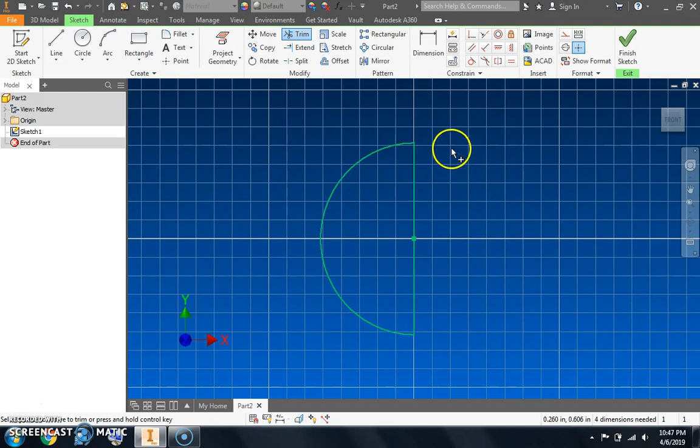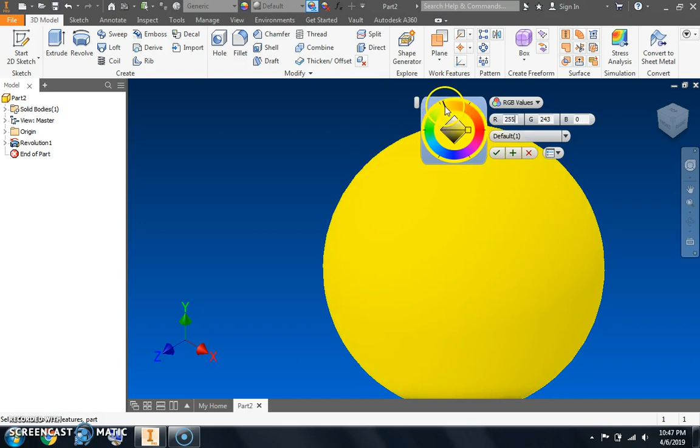Use the trim command, clear off half of it, finish the sketch, do a quick revolve. It's already going to find the side. The axis is going to be that center line. And that's how you're going to end up with the circle. To get that complete sphere, we could change the color of it. The majority of the characters in this particular cartoon are yellow, so I'll set that to yellow.

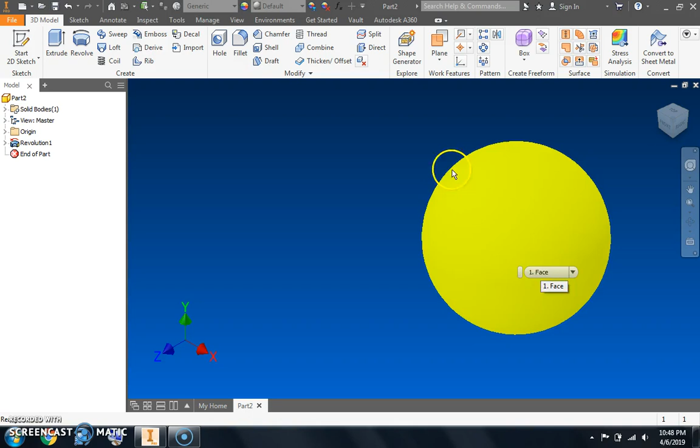Alright, next. We need to draw the eyes, the nose, the ears, all that stuff. So the problem is you can't start a 2D sketch because there's no flat surface to draw on. We're drawing on a sphere. So to change this up, we're going to come over to Origin, turn on the plane that runs through the middle of this thing. So you're going to find the one that runs through the middle. I'll right click, turn on visibility. So now that is visible.

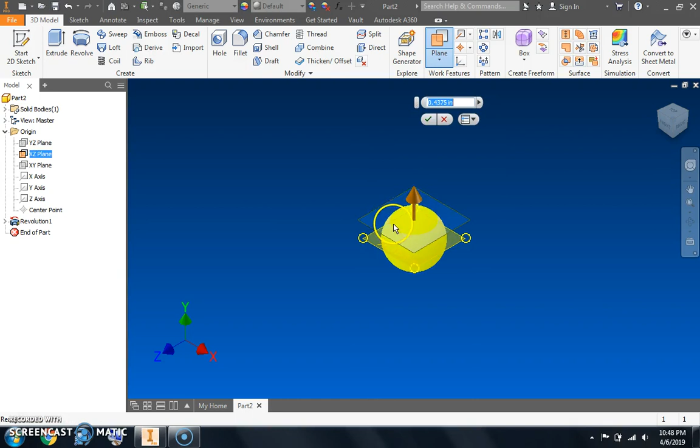We look at this thing from the side. It ends up being dead center. Our eyes need to be higher than that. So I'm going to come over, start a work plane, pull a work plane up higher. How high am I drawing this work plane? Well, if we look at this thing from the side, you can adjust this. Where do you want those eyes to land? So somewhere in this area. We can always adjust it later. It doesn't have to be perfect to set it off. We're going to hit the check mark.

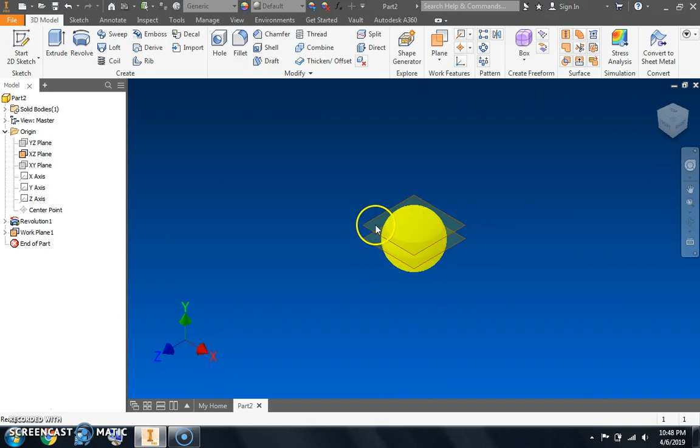Alright, we're looking at this thing from the side. You now have your work plane and you have your origin. I can turn off the origin, so I'll turn off visibility on the origin. I'm just dealing with the work plane. The work plane is roughly where the eyes are going to be. They might be higher, they might be lower. We can always make that adjustment at a later time if I'm off. So I'm going to start a 2D sketch. I'm going to select that plane, and now I'm actually drawing on that sketch.

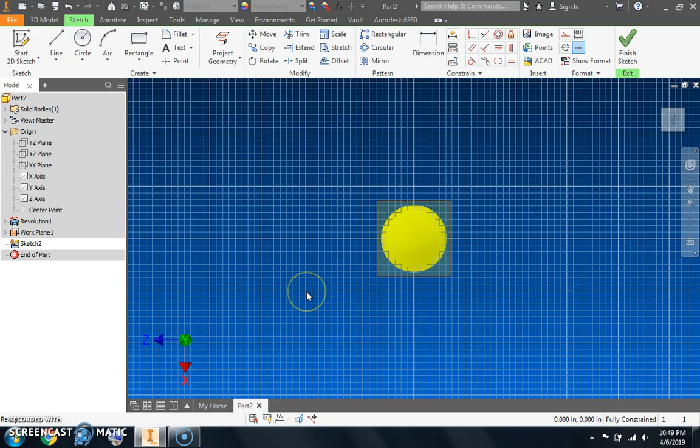When you go to draw on this sketch, something we haven't talked about yet, if you highlight this when it's red and I right click and I choose Slice Graphics, F7 on your keyboard, I click Slice Graphics. What that does, looking at this thing from the side, it actually chops off the top. So you're actually sketching inside of the shape, which is what we need because you're going to do a sketch that's going to be inside the shape. That's what we're going to talk about now.

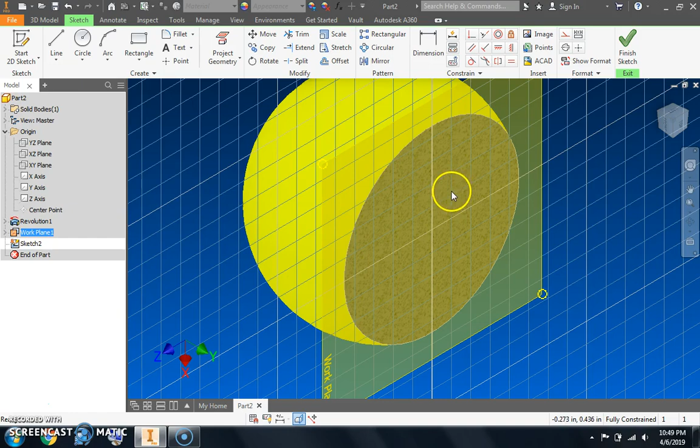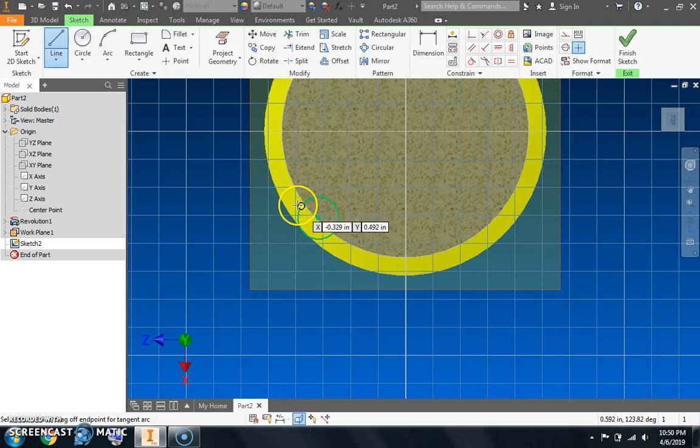So I look at this thing from the top. I determine where I'm going to put my eyeballs. So if I come over with a circle, you could do this with arcs, depending on what you want those eyeballs to look like. So I'm going to come in here, draw my first eyeball. Then come in with your line tool. When you go to sketch this line, I can draw this here on an angle. Trim off the excess, and I have a half a circle.

It does not need to be lined up. It can be off. You could always come in if you needed to. You could select everything, rotate it from the center point, and then you can spin this thing around in the direction that you need.

Alright, it does not matter where you're going to end up putting this, but you might not want a perfect circle. You might want more of an elongated half a circle. So it doesn't have to be a perfect circle. Don't feel that you need to use that circle tool. You can always draw it with the arc tool and get a much longer arc. You don't necessarily need to use a circle.

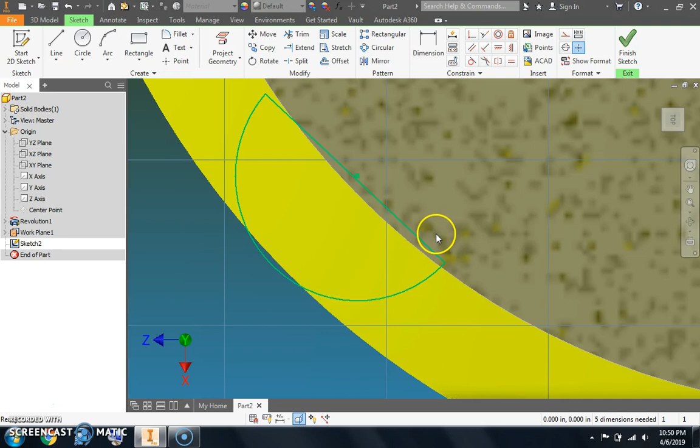Alright, so with this selected, I hit finish sketch, and we look at it, and we can see most of the circle at this point. Alright, so what I can do is, I choose Revolve, I come in, I select the surface, okay? Then I select the axis, and it will rotate that around.

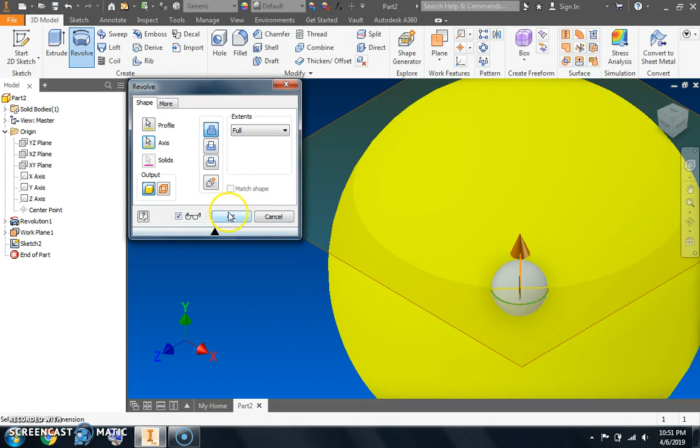I press OK. If we go to color this in, most of the characters have black eyes, so with this selected, I can come in and set that to a black color. All right. Looking at this thing from the front, okay, my eye is off to the left. I could always come in,

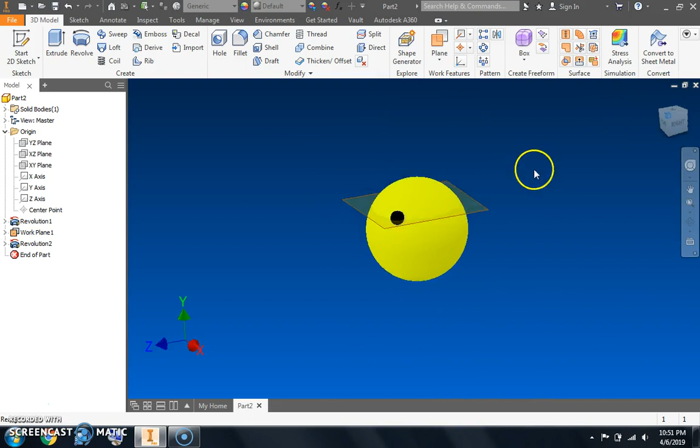turn on my origin, okay, which runs through the middle of this thing, turn on visibility, okay, there's my eye, it's dead center, okay, we all know where I'm going with this next. So if I choose mirror, okay, with everything selected, I select mirror, I select the eyeball, I select the plane that I'm going to mirror this through, alright, and the other eyeball will end up over there on the right, okay, they will end up being evenly spaced.

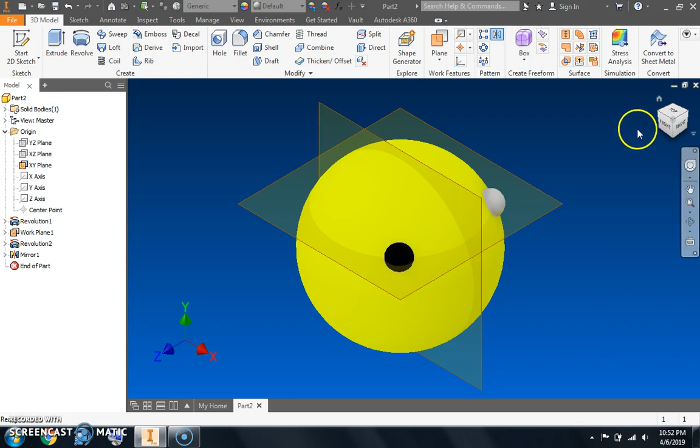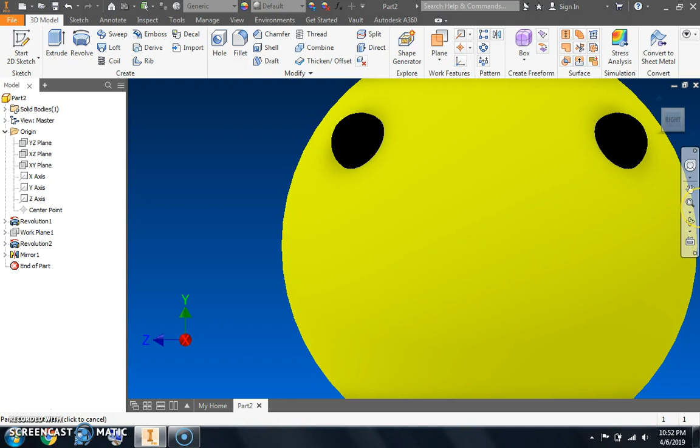I can color that eyeball in, currently set to gray, okay, I can set that one to black, turn off some of my work planes, okay, turn off visibility, alright, and I can also turn off the work plane that runs through the middle of this thing, okay, we look at this thing from the front, the eyes are starting to form. If you want them to be closer together, you do not have to start all over again,

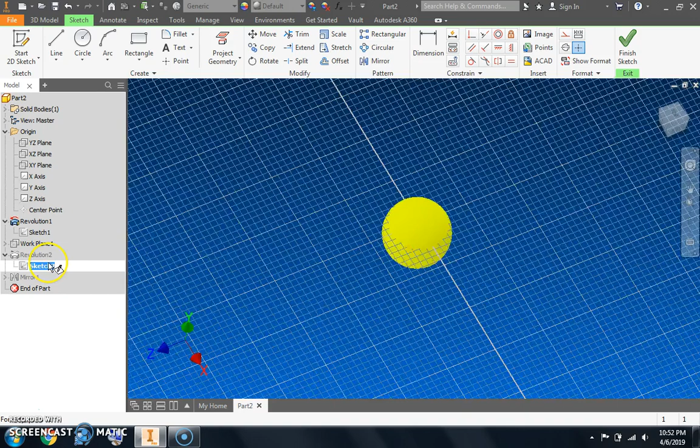we can come over, find the revolution, which in this case is right here, okay, and at this point, with the original revolution, I can get over here to my sketch, which ends up being on revolution 2. I double click, okay, I am now editing my sketch. I can right click on this and slice the graphics so I can see my sketch.

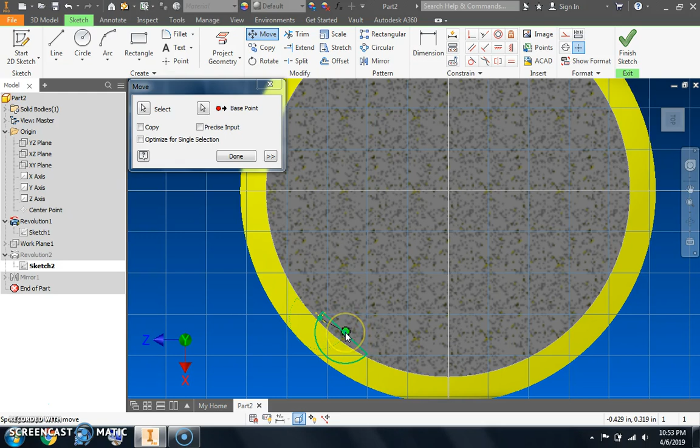And if I needed those eyes to be closer together, I could highlight all of this and move it over, okay, and it would be towards the center of the head, or I could move it further away, depending on what you're trying to do. With this being the demo, I'm not going to spend a whole lot of time here in the video, but we could come in, select the move tool, I could highlight all of this, and then choose my base point being the center, and I could relocate this eye to a different location, but I'm not going to do that now, just for time purposes, we'll leave it as is.

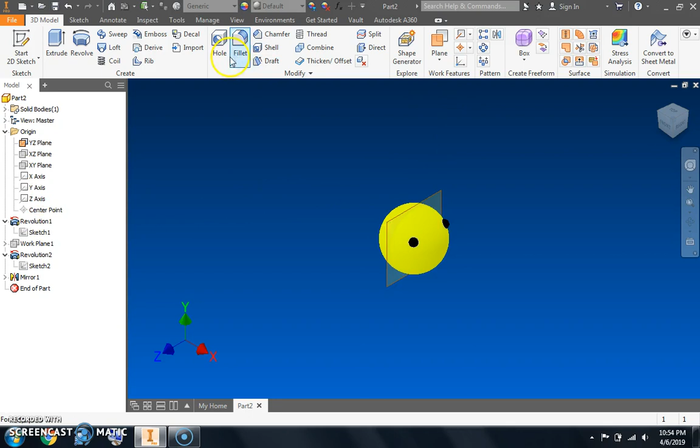We're looking at this thing from the right. We have our two eyeballs. Let's say we wanted to do over here some type of mouth, okay, so if we look at this thing on an angle, we look at our work planes, we find the work plane that we want to pull off of this, which in this scenario would be this. I right click, I turn on visibility, I'm going to pull a work plane off of this out past the shape, okay, hit the checkbox, we look at this thing from the side, what am I doing?

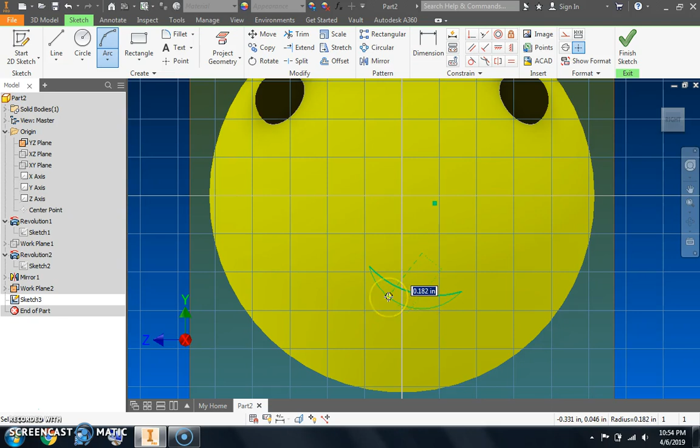I got the work plane, I pulled it out past, alright, once I have that, I could start a 2D sketch on this plane, we zoom in, if I want to draw the mouth, I could come in with my arc tool, draw my first arc, select the mouth, oh, missed it, let's try it again, okay, and go arc tool, select, and you can pull it, what type of mouth do you want that character to have, alright, finish the sketch.

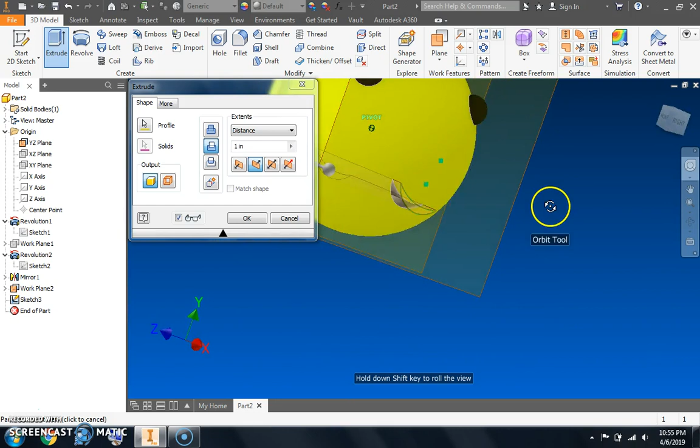Now I can come in, I can choose an extrude, I'll select that shape, I'll have it go in, it's going to be a cut, you've got to make sure you select that cut command, alright, and as we start to look at our shape here, it's going into the shape, okay, it's cutting that mouth into it.

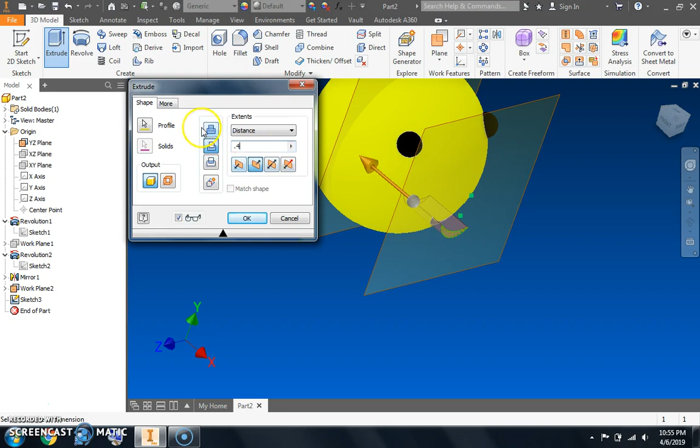Unfortunately, our mouth right now is going way too deep into our character, so instead of 1 inch, you would have to type in different numbers here and figure out what number would work, okay, so if I go with, I don't know, let's just try one out here, have it set to cut, press OK, your numbers are going to be different depending on the size head you have, alright, and if we look at this thing, we rotate it, there is the mouth being cut into the shape.

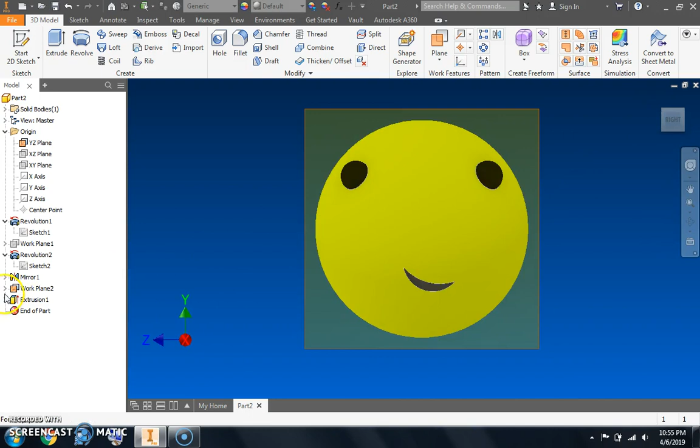If we look at this thing head on, and if you don't like where it's at, you simply come over to extrude, you come over to sketch, and you move your sketch higher on the shape. So it's not always going to work the first time, you have to move things around. We still need a nose, we still need ears.

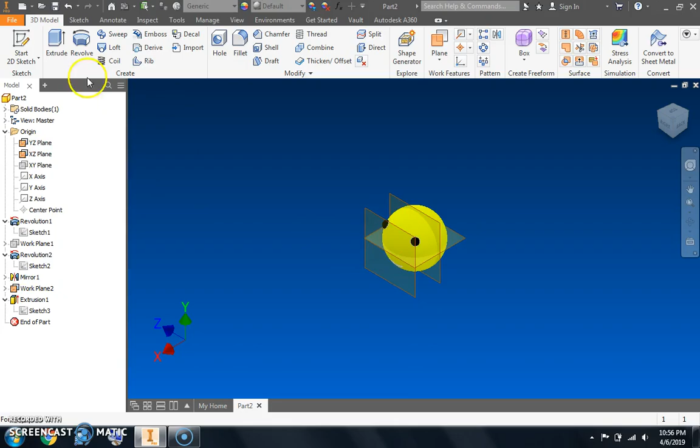So if I'm doing ears, I could come in, turn on this plane, turn on visibility, start a 2D sketch on that surface, I zoom in, I right click, I slice the graphics. We are actually drawing inside the shape; it cuts the top of our shape off. So from the top, I can come in, get my circle for my ear.

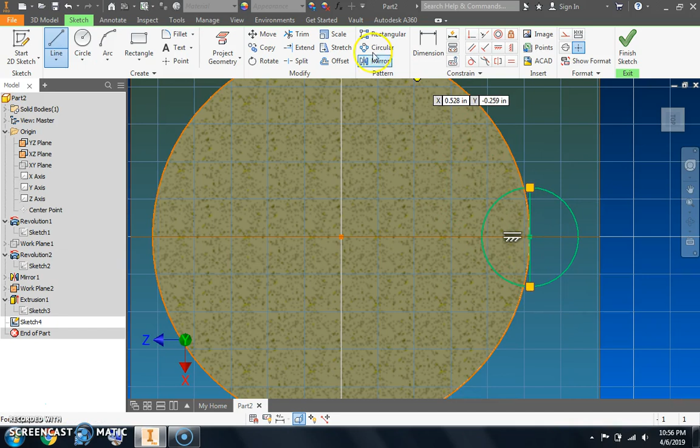How big of a circle do I necessarily want? You get to decide. Is it huge? Is it small? Every character is going to be different. So once I have that, I can come in, draw a straight line, get my trim command, clear off half of it, finish the sketch, choose revolve, select the shape, revolve it around the axis, and then I start getting that ear.

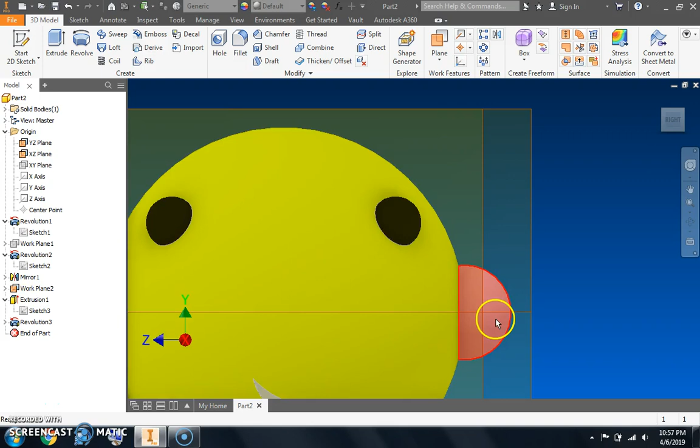Alright, I press OK. We look at this thing from the side. This is probably out too far. I'd want to move this sketch into the shape more. It looks more like he's wearing headphones. This is a little bit too big, but I would slide that in a little bit more. So if I come over here to revolve, I double click on the sketch. Now I'm editing it. I right click, I slice the graphics.

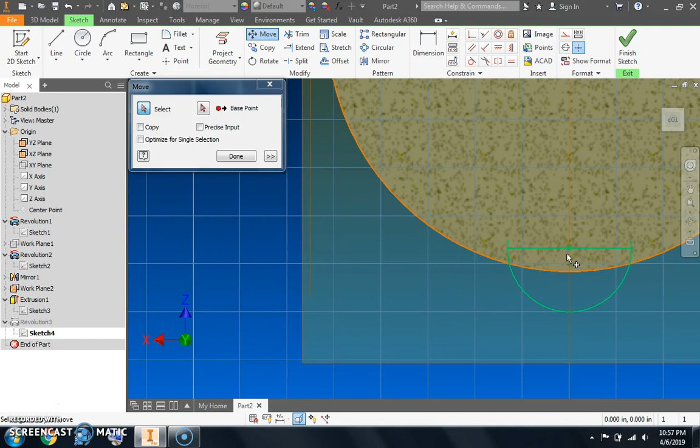If I need to move this shape in further, I would select the move command, select everything that I have, choose the base point being the middle, and I could easily slide this within the shape. I hit finish sketch, and that moves the ear within. If it's too big, it's too small, you can always edit that. Alright, that gives you a good start.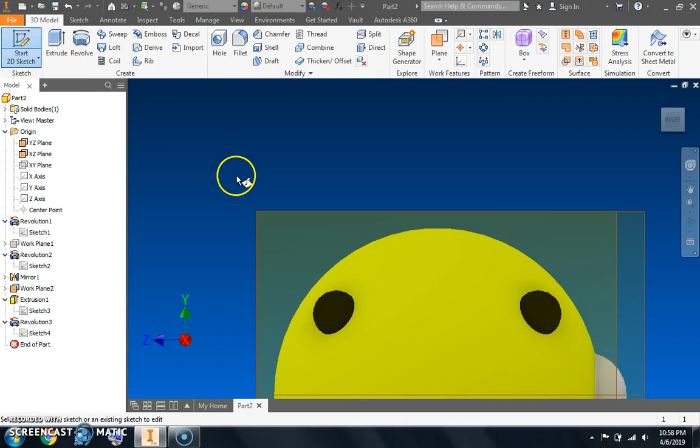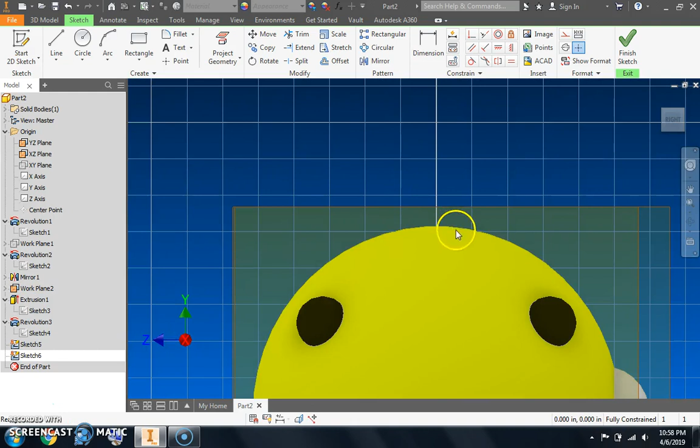Let's talk about hair. If your character has hair or some kind of crazy haircut, we could start a 2D sketch on this plane. With the plane selected, I could easily come in, right click, slice the graphics. Doesn't look like I had the right work plane origin turned on, so let's start a 2D sketch on that plane, and then I can right click and slice the graphics. So now we're within the shape.

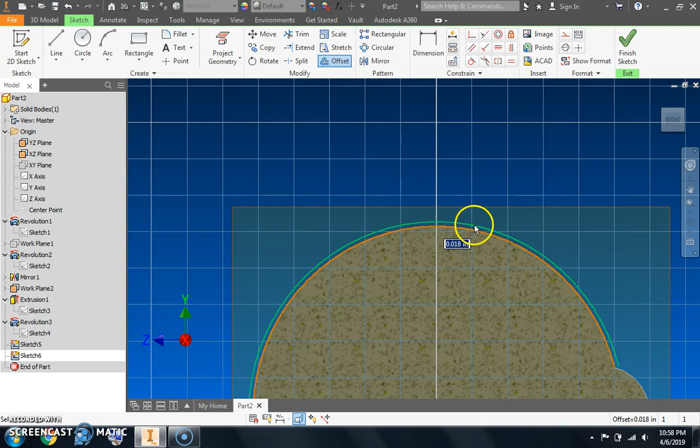I could always project the geometry, so I could take this and say, you know what, I'm going to offset this. So if I choose the offset command and I select this, I can actually pull this out a little bit if I want to add a little bit of hair. Once I have that offset, I can draw a quick line, like so, and then if I needed to, I could offset that hairpiece again within the shape. Then I use my trim command, start getting rid of some lines.

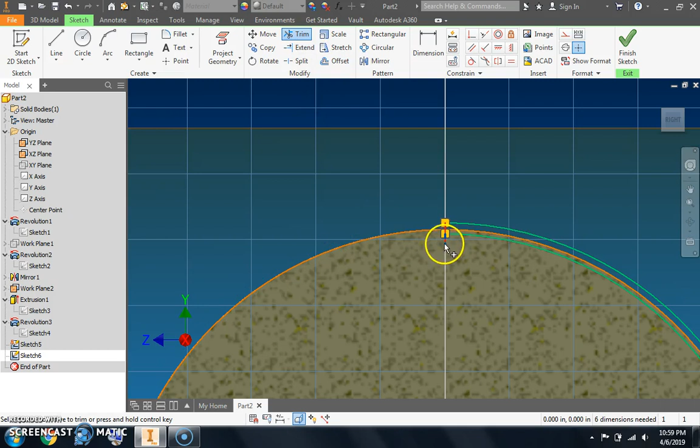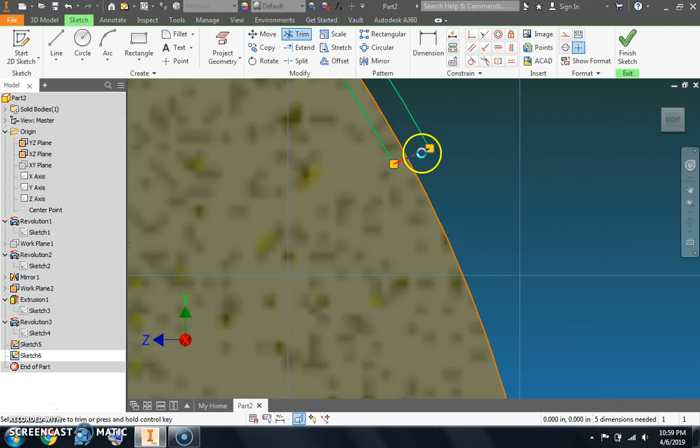We come over here to the side and make sure that I draw a straight line wherever you want that hair to stop. You can always draw it longer. I choose the trim command, I clear off, get rid of some areas. You'll notice here that I have a little bit past, that's where the hair is going to start and stop. At the top I have my solid line there, and we'll finish the sketch. I choose the revolve command, I zoom in.

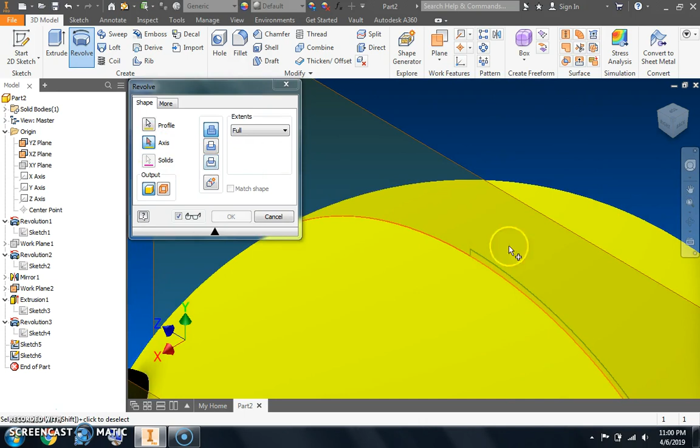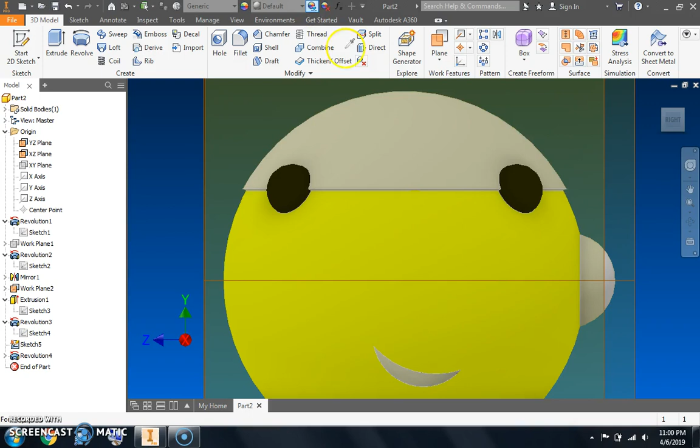So I have that selected. I'm going to rotate around that axis. I'm going to make sure I'm adding material. I don't want this to be a cut, so I'm going to add some material. I press OK, and we zoom out a little bit. Obviously I made the hair a little bit too long. The hair should have been shorter, but you can easily come in and set the color of this. And you know what, I want the hair to be black.

I didn't need the thing to come all the way down, but again, you're going to have different measurements depending on the character you're doing. Some of the characters are small, some are larger, but you get the basic idea on how to draw with spheres. You're not going to be able to emboss on a sphere, so everything's got to be either on work planes, slice the graphics, and draw within.